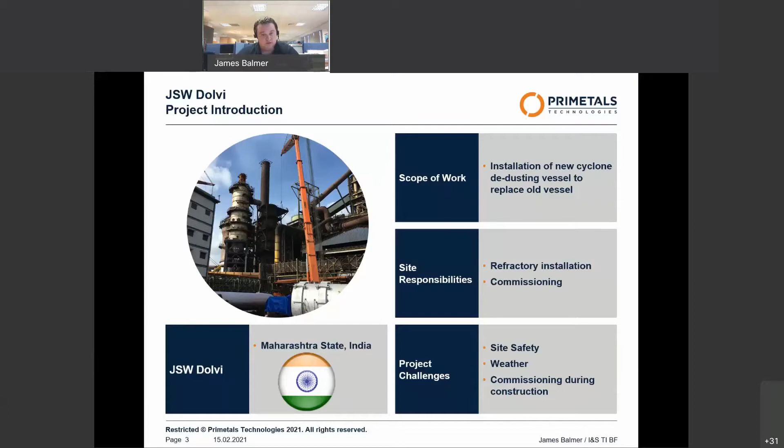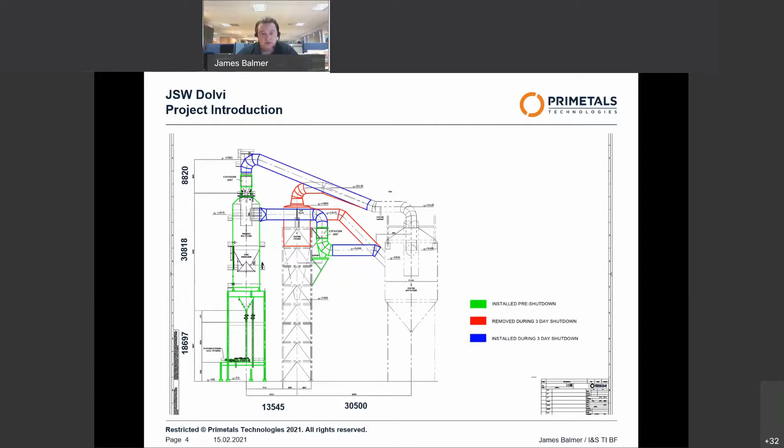So the project, for me, was split into 3 primary phases, the latter 2 of which will be explained in greater detail, but just quickly to summarize. Phase 1 was the design. This was done almost entirely within the office. I took client operating data that the customer had provided to Primetals and used that to size the cyclone dedusting vessel and all the associated equipment and mains.

Phase 2 was the overseeing of mechanical and refractory installation on site. I was required to be on site for this period, as the refractory material itself was a guaranteed item under the terms of the contract that Primetals signed. Phase 3 was the shutdown and commissioning. So all of the pre-shutdown preparations, the shutdown itself and all the associated work, and then post-shutdown checks and commissioning.

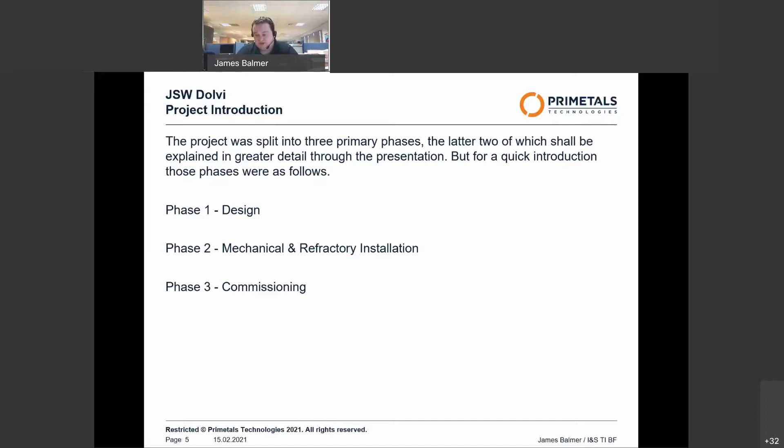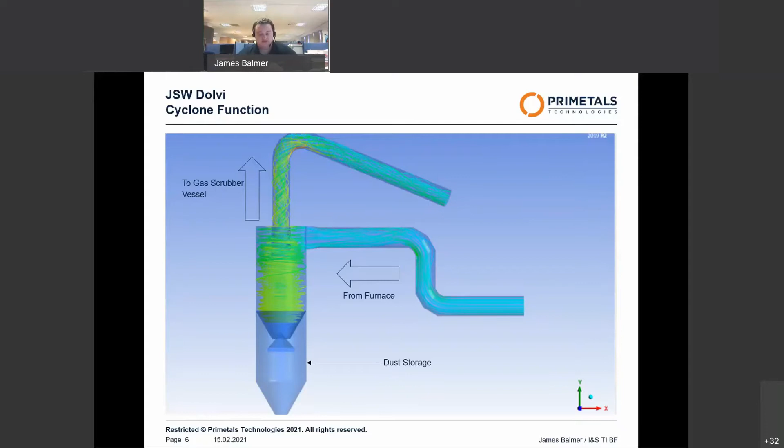The concept behind it is that the gas enters tangentially to the cyclone itself, imparting a rotation upon the gas, which then, through centrifugal force, causes the dust entrained within the gas to impact into the side of the vessel. This dust loses velocity, falls to the bottom of the cyclone, and is then collected in the dust storage area directly below. The gas stream, with smaller entrained particles still contained within, is then taken out of the exiting main into a wet scrubber system.

Secondarily, refractory installation. I was supervising the installation alongside a third-party contractor who was responsible for making sure that the refractory material itself was correctly applied. We had issues with the refractory storage. From the day that I arrived on site, the material was stored in various stores areas around the site, and there was no single consolidated stores log for how much material there was on site at that time, or indeed how much had been used. This was rectified eventually. All the material was brought into a single storage area, catalogued, and we did have the original delivery notices, but they were not accessible at first.

Other issues around the refractory installation arose as a result of the high temperatures. We frequently saw temperatures of 30 degrees, if not exceeding 30 degrees, which had the unfortunate side effect of causing the rapid curing of the refractory material. This reduced the amount of time that we had available to work with the material, whilst also, in some extreme cases, being the cause of some rather large stress fractures as the material cured quicker

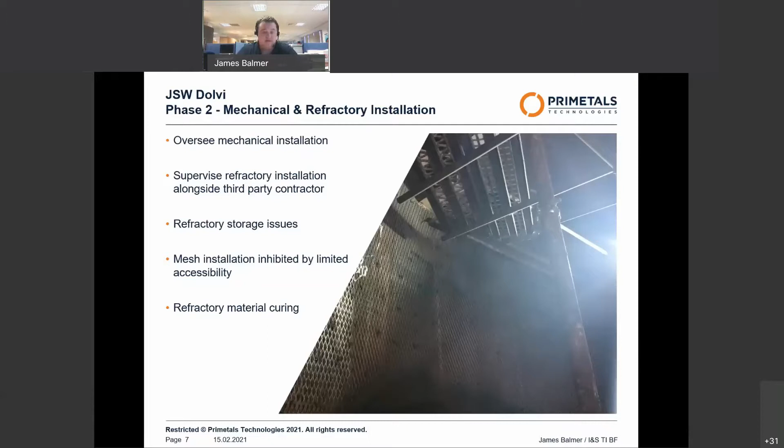than we had expected. This, thankfully, was rectifiable by the application of a liquid retardant supplied by the third-party contractor, which was mixed with water to cool and thus slow the curing. In cases where cracks had occurred and propagated, we were also able to go back and fill in those cracks with more refractory material.

Working on site in India, the primary concern is safety. You can see the picture there is the state of the scaffolding within the refractory at the time of my arrival on site. Unfortunately, in this instance and in many instances, the client is responsible ultimately for erection, and therefore the client is also responsible for site safety measures. The extent of my ability to influence safety on site ends at the point at which I can only request changes to be made to that situation.

Several requests were made for the scaffolding to be improved to a more European standard. Unfortunately, these could not be met. However, we were able to make sure that any workers within the cyclone vessel were mandated to wear fall restraints and thus reduce the risk of serious injuries as a result of falling off the insufficient scaffold.

Again, temperature was a cause for some concern. Working within that cyclone, the airflow within the cyclone and ventilation is somewhat limited. There's very few man access points, and it is a mostly enclosed vessel. As a result, those high temperatures inside the vessel were exacerbated by the lack of airflow. We did put requests in, and we were eventually granted the use of a large industrial fan, which we used to induce an artificial airflow within the cyclone.

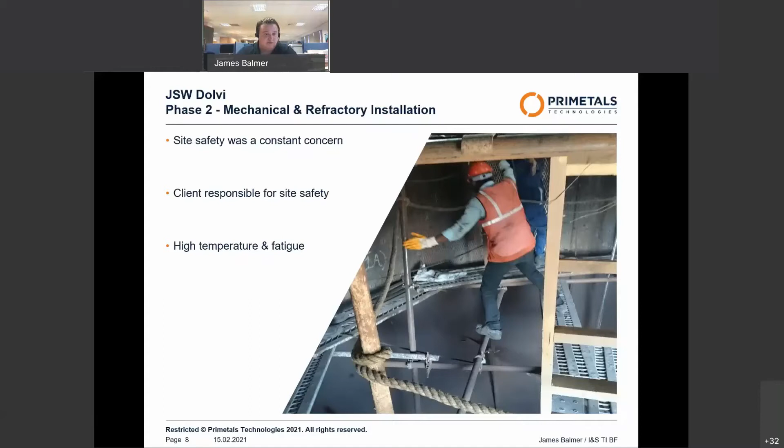Phase 3 was the shutdown and commissioning phase. Primarily, this was split into 3 sub-phases, those being the pre-shutdown preparations, the shutdown itself, and then the post-shutdown recovery. Pre-shutdown preparation for me primarily consisted of ensuring that everything was in place ready for commissioning, and then commissioning as much equipment as I was able to do before the shutdown itself.

Unfortunately, when I arrived on site for this period, there were several utilities that were not in place that were required. Requests were put in for that oversight to be rectified. The shutdown phase was, when planned, a critical 3-day period in which the existing vessel and mains were to be removed, and then the new mains were to be installed to connect the furnace and wet scrubber to the new cyclone that had been installed prior to this period.

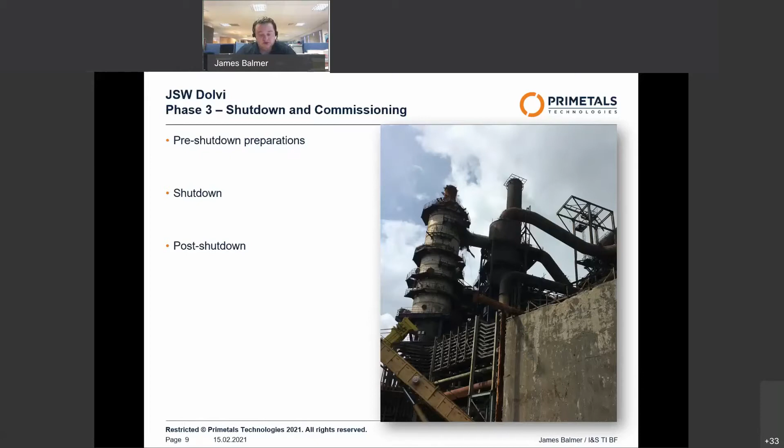This was a construction site at this point, and there was heavy lifting around with all the mains being removed. And so any commissioning that needed to be done during this period, and some did, needed to be carefully monitored and planned around those lifts. And post-shutdown saw me preparing for the furnace to be brought back online, and then waiting until such a time as I could finish the hot commissioning of the cyclone itself.

So you can see there a nice picture of one of the cranes that we used. That was the larger 800-ton crane. The lift was planned in 3 parts, as the drawing that I showed at the start showed. We didn't manage that as a result of a number of estimates and calculations for the weight of the mains and cyclone body that were being removed being incorrect by up to 50%. That put the existing inlet main alone, which was the smallest of those lifts, at the safe working limit of that 800-ton crane, which we can see.

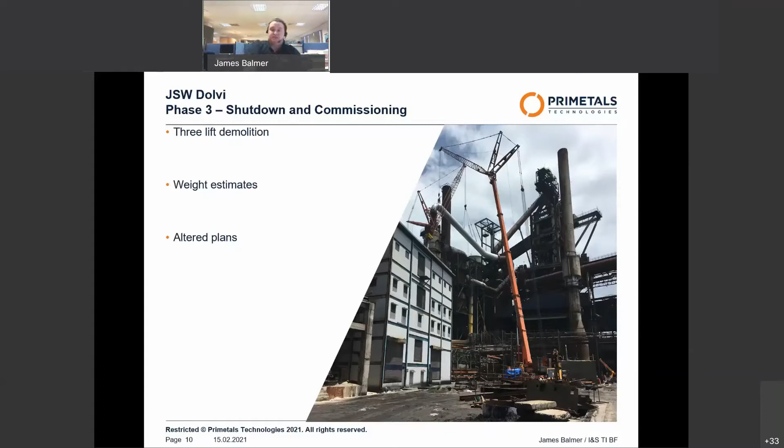That led to the need to recalculate the weight of the plant that was being removed. And then, as a result of that, the lifts and demolition needed to be replanned. So the top of the existing cyclone that was being removed needed to be removed in 3 separate lifts, which induced a delay onto the project, meaning that demolition alone would take 3 days to complete.

Now, once demolition was complete, we then had to install the new mains to connect the vessel to the existing system. This was planned primarily on the basis of a site survey that was made at the request of the client by a client's contractor. That survey was used to establish where we would cut the existing mains to tie in the new mains with the existing system.

That was not an accurate survey, unfortunately. As a result, the mains were cut in locations that were not ideal for tying in of the new mains, and as a result, we needed to make a few site modifications to correct that and allow the mains to actually be tied in a gas-tight manner.

During this period, I found it necessary to commission several pieces of equipment that I hadn't managed to do prior to the shutdown: the pug mill, which we can see in the picture there, and also the nitrogen supply line to instrumentation. So the nitrogen supply line was one of the utilities that wasn't in place when I first arrived on site. Thankfully, when I pointed that out and requested it be put in place, it was done rapidly, which allowed us to then complete the commissioning of those instruments on time.

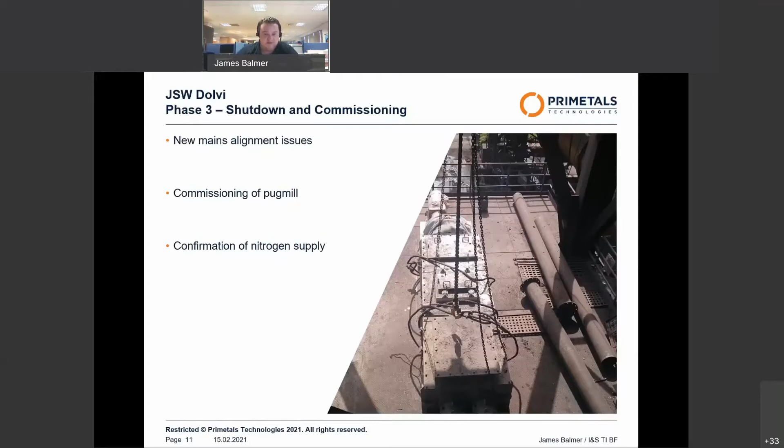The pug mill, however, did not have a water supply when I arrived on site. Again, it was rapidly installed. However, unfortunately, the contractor responsible was working using an early draft of the drawing, and a key control valve in that supply line was left out as a result, leading to further modifications and corrections being needed. Thankfully, these items were not impinging on the critical times with the delays induced by the errors made during demolition and installation. The small time delay involved with the pug mill commissioning was negligible.

So, with the installation finished, the furnace was brought back online, and after some initial setbacks, it was brought to a stable operation period in line with production before the shutdown. Unfortunately, the cyclone radars did begin to show some issues early on. After the stable operation period was achieved, one of the radars began to report a near 100% fill level, whilst the second continued to show a regular, if slow, filling. We determined that later to be a result of the radar branch having been blocked by furnace dust.

Ostensibly, the nitrogen purge would be able to rectify that. Unfortunately, there wasn't enough pressure behind that nitrogen purge line with which to achieve the unblocking of that particular branch. After further discussion, when coming back from site, we've supplied a valve to be installed into the radar branch that will prevent the accrual of dust and the blocking of that branch in the future. Unfortunately, these issues couldn't have been predicted and were not known, as Dolvi is the first site that we've commissioned radars.

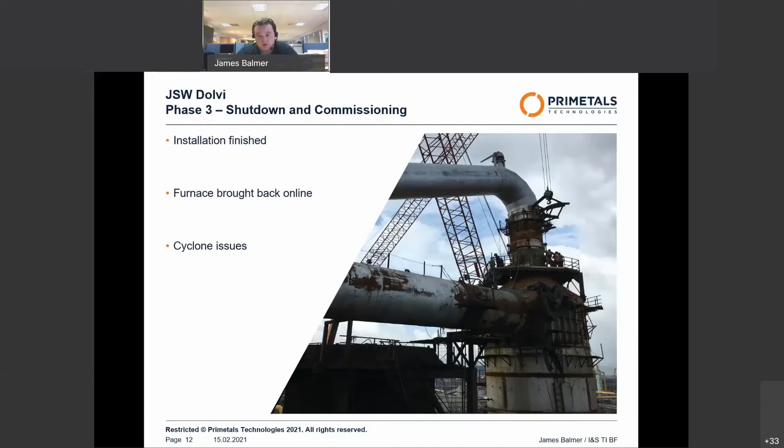So, to conclude, there are issues that were experienced on site. Some of them outside of my ability to control in any other way but mitigation. Safety being one of them. Safety is always an issue in my experience on Indian sites, and all you can do is request that changes be made, and in this instance changes were made. They were not ideal, true, but they were made, and it did improve site safety.

Weather, again, was mitigated for as best as we could. Finally, commissioning. Needing to commission in the middle of a construction activity is not ideal by any stretch. As a result, you need to plan properly and work alongside those contractors responsible for the construction to ensure that there is no unnecessary overlap of activities. Despite all of this, JSW Dolvi was a successful project. The cyclone was installed, commissioned, and performs in its intended role.

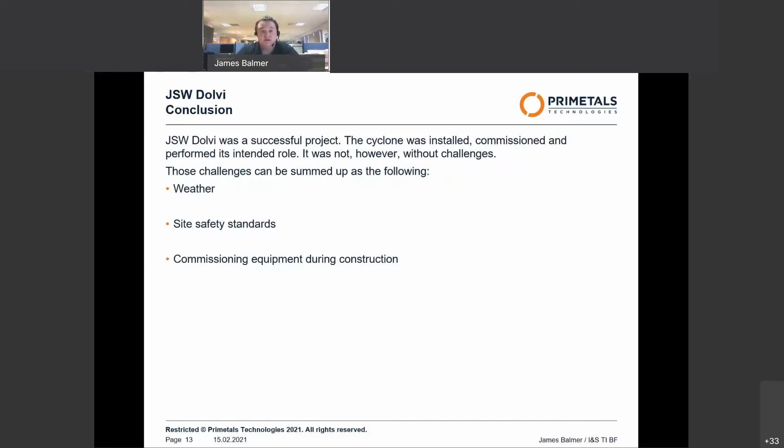Thank you very much for your time. Please, if there are any questions from the judges, feel free to ask. Okay, thank you very much, James. Alan, would you like to start the questions with a question? You need to unmute yourself first. Okay, I think I've successfully unmuted myself.

So thank you, James, for a very clear and interesting presentation, reminding many of us that the world we have to deal with is the real world rather than the way we might like it to be. You said you had to control a number of things by mitigation, but of course you now have the experience of this installation behind you. So in future you have the luxury of being able to anticipate rather than mitigate. Could you suggest a couple of things that you would do differently in setting the job up in the first place if you were to revisit something like this in the future?

Okay, yes. So I'm going to answer that one from a safety perspective. I believe that was the angle that you were asking the question from. The issue that we have in situations like this is that the client ultimately is almost always responsible for safety of the site in general. Obviously, we are personally responsible for our own safety and the safety of others around us, but the site safety itself is frequently the client's responsibility. In the future, yes, certainly there is more that we could do, but again, you're relying on the client to implement your suggestions.

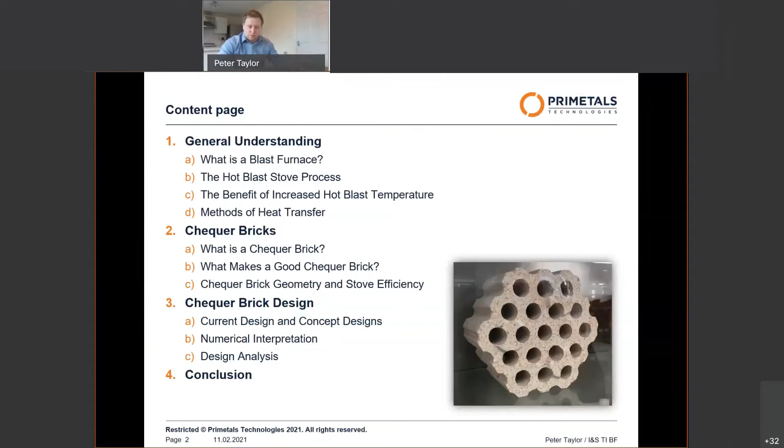So the first slide is what is a blast furnace? So a blast furnace is essentially a vessel which is used to produce molten iron from 4 ingredients, which are iron ore, fuel, so often coke, some form of flux such as limestone, and hot air. The outputs are molten iron and slag.

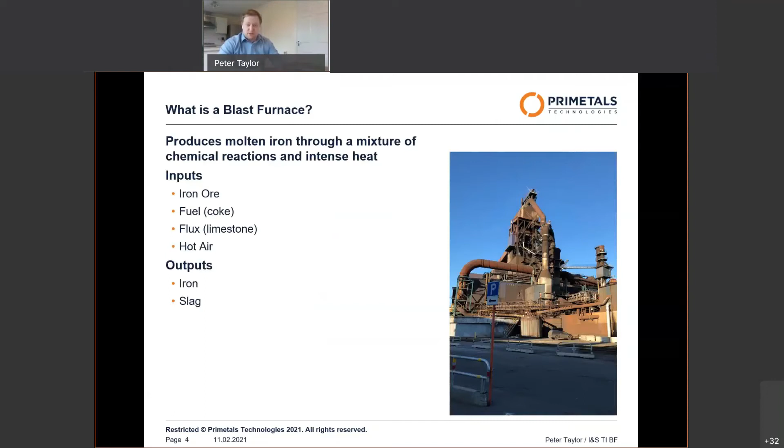And so previously we said one of the ingredients is hot air, and that comes from the hot blast stoves. So hot blast stoves, like I say, are used to produce this very hot air which is blasted into the furnace. The intense heat in the hot blast stove is produced on one side, which is the combustion chamber. This heat is then stored within the chequer chamber and is later used to blast cold air back through the stove to heat the air before it goes to the furnace.

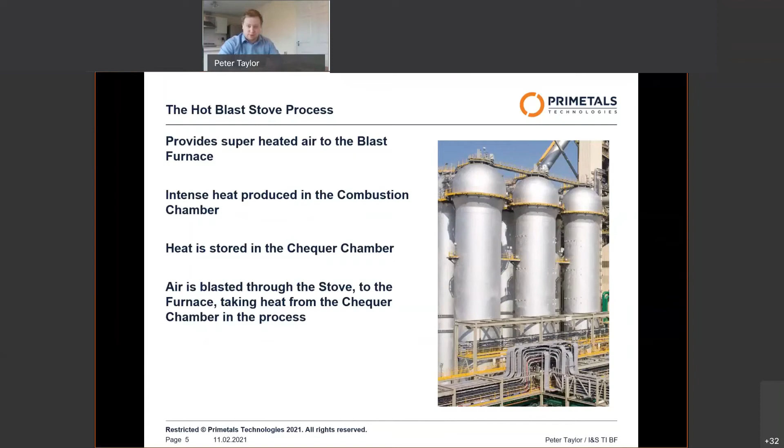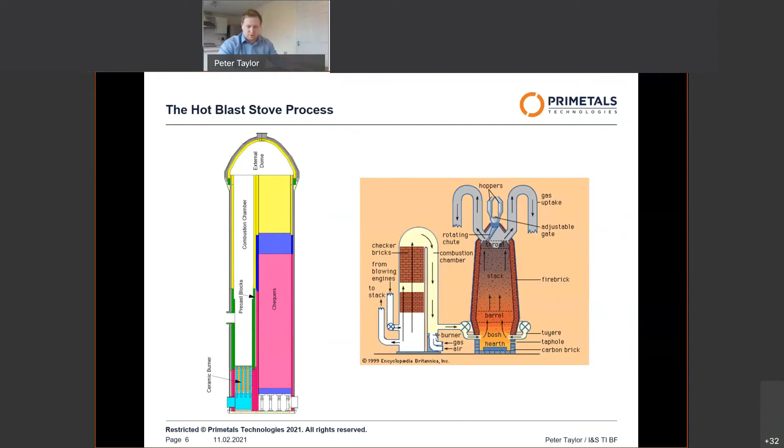So what are the benefits of an increased hot blast temperature? So of course the main benefit is always going to be cost saving. That's what business is all about, and the cost savings from increased hot blast temperature can be quite severe. As a general rule of thumb, by increasing the hot blast temperature by 100 degrees, we can reduce the required amount of coke by 7 to 20 kilos. So just a quick calculation shows that if we increase hot blast by 100 degrees on a 10,000 ton per day furnace and save an average of 14 kilos of coke per ton, with the price of coke being approximately 0.25 euros, we would save 35,000 euros a day.

And on the other side of that is the more green side of increased hot blast temperature compared to producing that heat within the furnace. So by needing less coke, we're burning less fuel, which is more efficient. It's producing less fumes, less greenhouse gases. It's better for the environment, which obviously is a big thing now. So yeah.

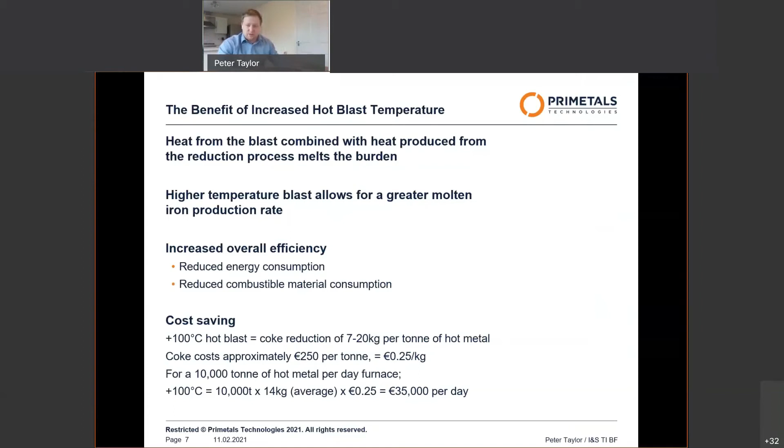Now we'll look at the three different methods of heat transfer. So the first one is conduction, which is the process of heat transferring from two particles coming into direct contact with each other. So if you think like a pan on a stove, or in this instance, the hot air touching the chequers within the stove.

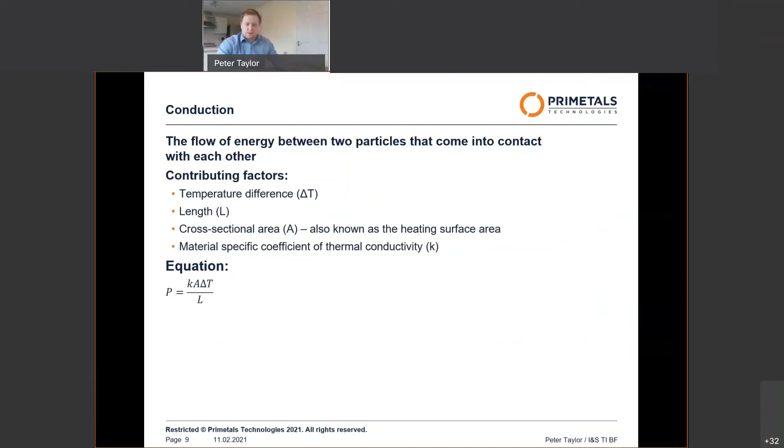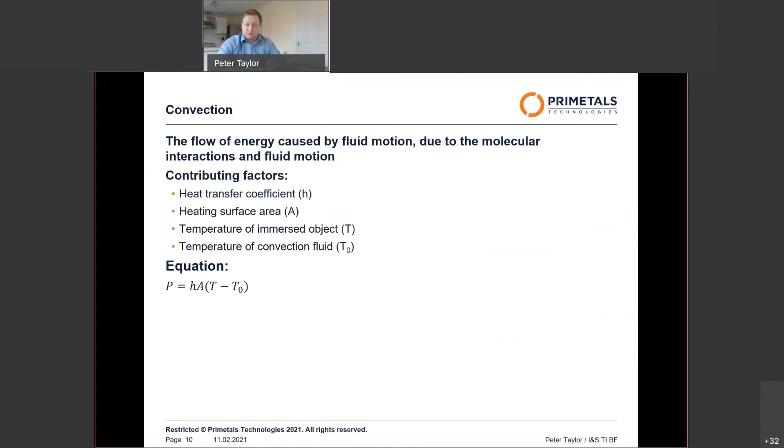The next form of heat transfer is convection, which is the result of fluid motion, such as air passing by cooler air. So there are two types of convection. You've got natural, which is the result of varying densities of fluid. So if you heat a fluid, it becomes less dense as the heat increases. This then rises, displacing the cooler, denser fluid, which will then heat up, and the pattern continues, causing the flow of air or whatever the fluid may be. The other form is forced convection, which is the same sort of idea, except instead of the densities causing the fluid motion, it will be a fan or something along those lines.

The final form of heat transfer is radiation. And this is the result of electromagnetic waves, so light, radiating from the heat source to whatever it's heating up. This doesn't need a medium to travel through, so like the sun heats the earth, it can travel through space where there is nothing between the two.

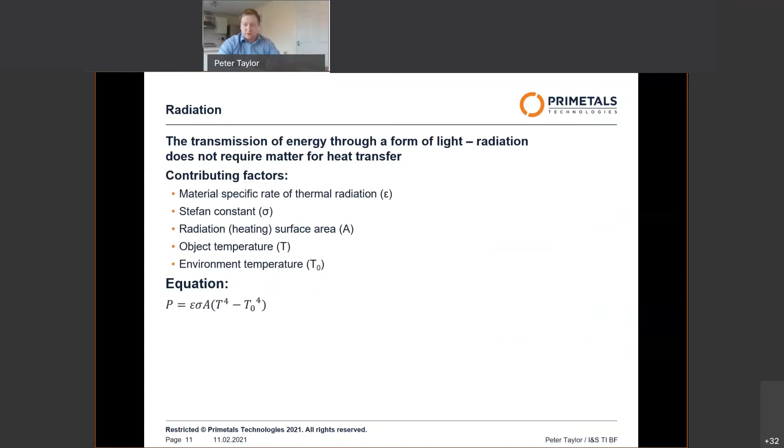Now, if we look at the three types of heat transfer and the equations involved in these, where I've highlighted, you can see the heating surface area is directly proportional to the rate of heat transfer for each mode of heat transfer.

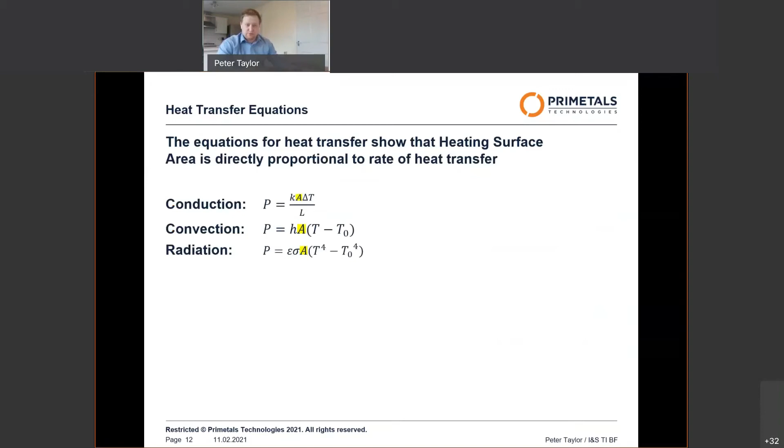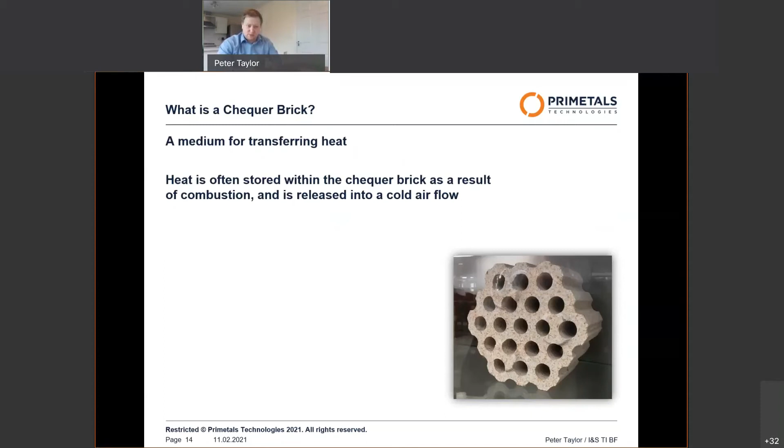And this takes us on to chequer bricks. But what is a chequer brick? A chequer brick is a heat transfer medium, so it would store the heat and release it at a later point. What makes a good chequer brick? So there's four main points for producing a good chequer brick. It's the ergonomics, so how easy is it to handle and install. There's no point in having a perfectly efficient brick if you can't install it into the necessary process.

The next point is how manufacturable it is. Again, it doesn't matter how great the brick is. If you can't make it, it's a pointless exercise. It's got to be suitable for the manufacturer to produce. The more technical, you've got the cold crushing strength. So the chequer brick has a very large stack of bricks above it. If the bottom bricks aren't strong enough to support all of the bricks above, they will crush. Therefore, they need to have a sufficient cold crushing strength.

And the final point is the heat transfer process. So how well the chequer brick absorbs and releases heat. Because of the mode of heat transfer, there's got to be sufficient airflow. There has to be a sufficient heating surface area to absorb and release that heat. And then there needs to be sufficient material within the brick to store the heat so that it doesn't just lose heat rapidly.

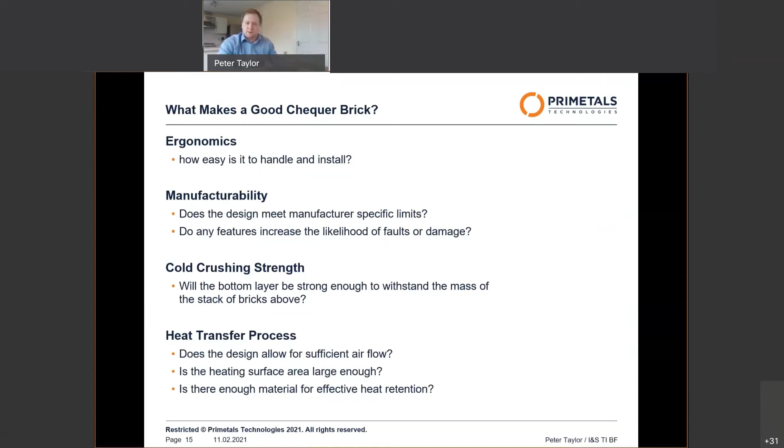So, as we've just discussed, there's the three main aspects of the geometry of the chequer brick, which are flues for the airflow to allow for sufficient flow of air through for the process, sufficient heating surface area to allow the brick to heat up and release heat at the rate required, and a good enough material volume to store the heat, making it more efficient.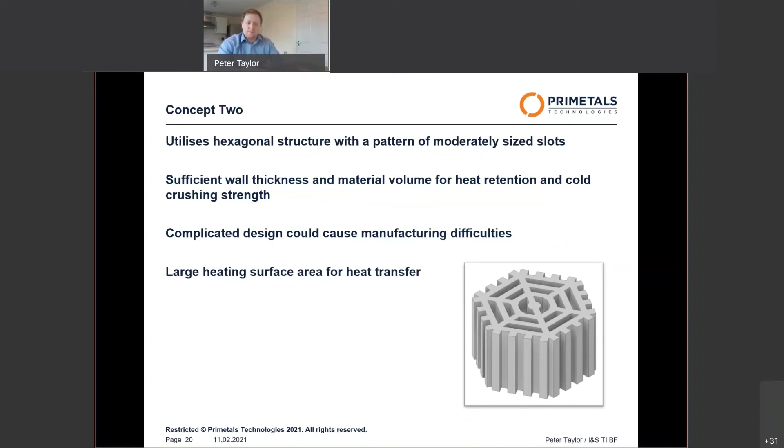Concept 2, same sort of idea, using slots instead of holes, just in a different sort of pattern. Again, it had a sufficient heating surface, it had a sufficient material volume, so it had a good enough cold crushing strength. It had further increased heating surface area for greater efficiency. Maybe it's a bit more of a complicated design, making it potentially more difficult to manufacture and therefore more costly, but overall greater than concept 1.

Concept 3 used a kind of combination between the standard and what I was trying to achieve. So with larger holes, again increasing heating surface area, but reducing the material volume, which potentially would result in a limited heat sink, meaning it would be less efficient. This would be much more manufacturable, though, although if the walls were too thin, that would be difficult for the manufacturer.

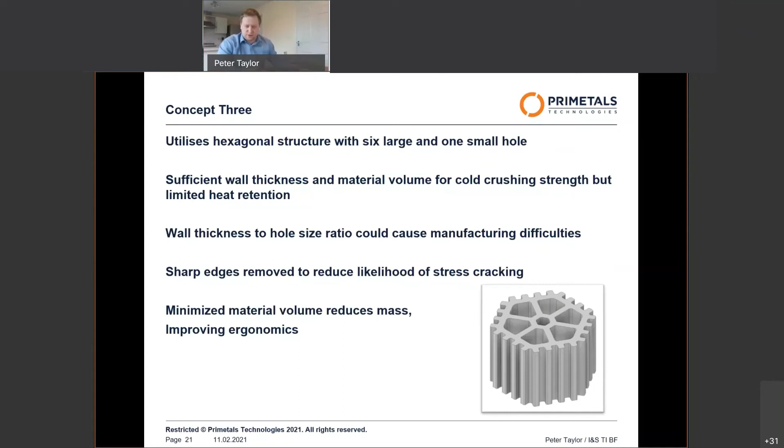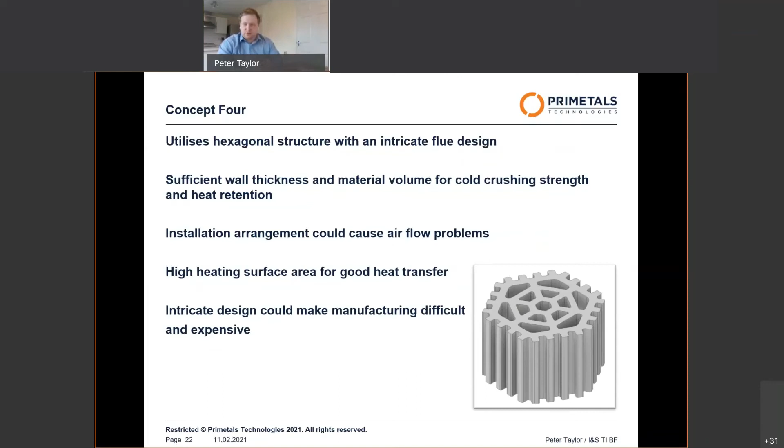Concept 4 combined concepts 2 and 3, making use of the kind of pattern produced in concept 2, but the more whole kind of flues from concept 3, further increasing the heat and surface area with a more intricate design, which again would potentially be more expensive but acceptable if the financial gain from the overall process was greater.

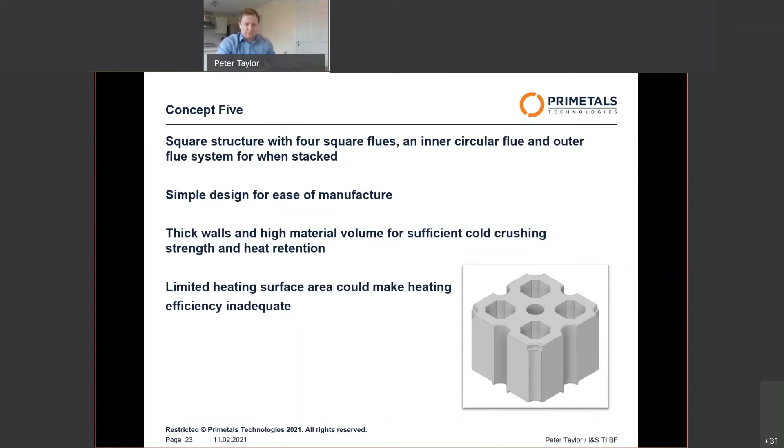Then the final concept was completely different. It focused around a more square shape, a more simple shape, with much thicker walls, and ignoring the details for the stacking method there, it would be much more simple to make, but with limited heat and surface area. So these were all compared mathematically and in a weighted matrix.

So this is the mathematical comparison showing the various cold crushing strengths of each brick and the heating efficiency of each brick. For this, I've assumed 62% alumina for every brick and a column height of 50 meters. So you can see the cold crushing strength for all of the concepts was greater, and the heating efficiency of most of the concepts was greater than the standard design.

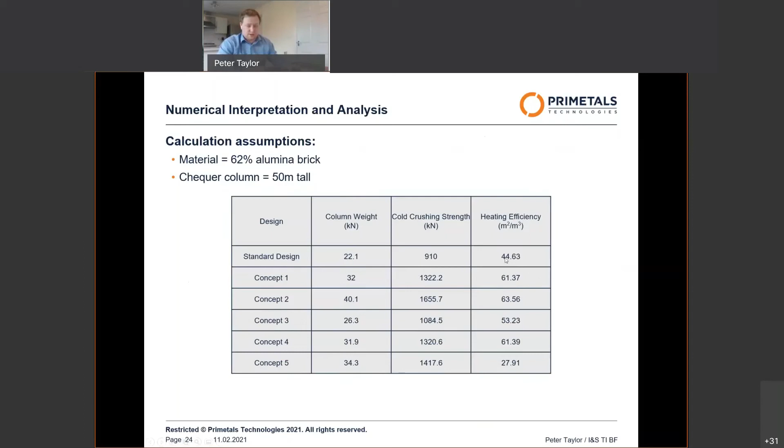If we move to the weighted matrix, you can see that the efficiency was weighted highly, because the main purpose of this exercise was to create a more efficient design. The strengths are found to be pretty much irrelevant for this task because every brick was sufficiently strong, so I gave that a low rating.

Manufacturability I considered quite highly. The cost was not as high as manufacturability, but more important than the strength. Ergonomics was rated as lowly as the strength because they were all well sized, so they were all going to be well rated. And the airflow was considered quite an average sort of weighting.

So the result of this was that concepts 2 and 4 were greater than the standard design, albeit only just. But if we were to examine this further, it would be likely that they weren't quite as good as the standard due to the higher complexity of the bricks and the more likely cost implications of the new designs. Concept 5 was a failure. It did not compete anywhere near where I'd hoped. And concepts 1 and 3 were not as good as the standard, so wouldn't be a viable option.

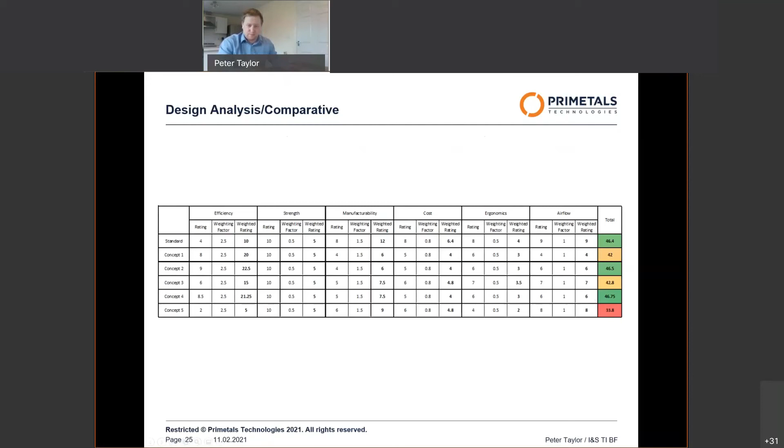So, to conclude, it's clear that the chequer brick has quite an impact on the overall blast furnace efficiency, improving the cost of running the furnace and offering a much greater profit to the supplier. The hot blast temperature again has quite significant cost implications, and where it's possible, an increased hot blast temperature allows for great cost savings.

The concept designs that were produced show that there is the potential to develop a greater design, albeit maybe the concepts that I've produced aren't where we'd like to be, but it does show that we don't necessarily have to stick with the standard design. It could be improved, but at that point, the standard design is still certainly an effective option, and it isn't a disadvantage to still use.

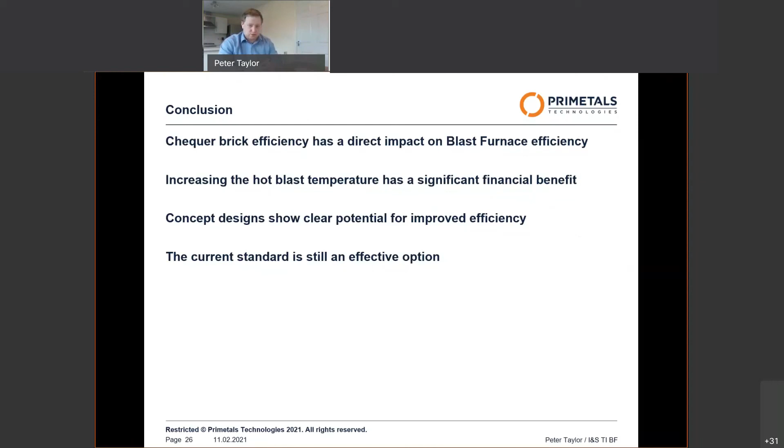So that concludes my presentation. Have you any questions?

Thank you, Peter. Let's start with Kimberly this time for a change. Hi Peter, you have a question? I do. That was a very interesting presentation.

I'm just curious about the data that you had about each of the different concepts, as to how each design was actually tested. What systems did you use? Was it virtual testing? Was it physical testing? How did you come up with that data for each concept? So you're on about the heating surface area in particular?

Yeah. Okay, so the heating surface area, I've calculated a form of efficiency for each one, which is the heating surface area over the volume, over the number of chequer bricks within 1 meter cubed. So it gives me heating surface area per meter cubed of bricks. So it hasn't been tested specifically on a computer program. It's more of just an Excel calculation, if that answers your question.

Yeah, it does. So at the end there, when you were summarising, you said there may be alternative designs that could be looked at and more improvements could be made. So what alternative testing methods, like using software, can you foresee in the future to maybe be able to improve the design even further?